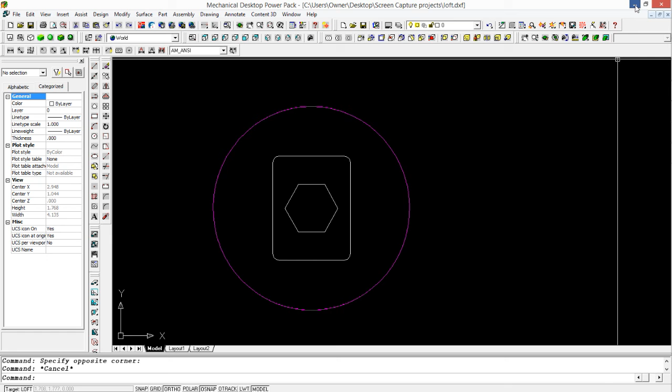Oftentimes in working with AutoCAD drawings, you have to completely close the AutoCAD drawing that you're going to be working with. That's not the case here, we don't have to close our drawings when we're working with 3ds. 3ds will grab the drawing as saved. So here we go, we're going to go ahead and open 3ds, and we'll open this file, and we're going to pick out DWG Loft. Or rather DXF Loft. There.

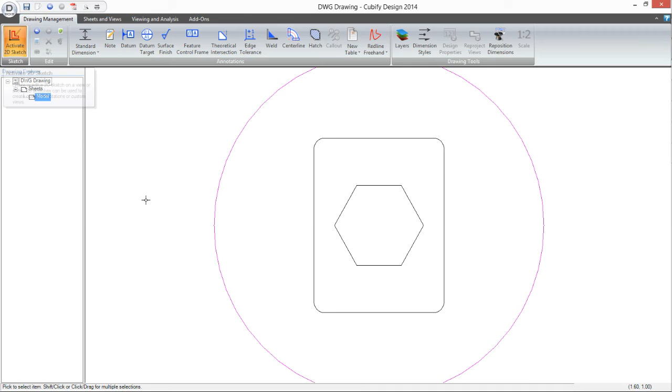Now as you can see, we have opened it, but when 3ds first opens, it opens into this creative window that, if you're using another drawing program and you're not into some kind of professional use, I don't know what all this stuff is particularly associated with, but it doesn't have much use for someone that's working out of another program to make their sketches. So we just go into sketch here, and there's our drawing.

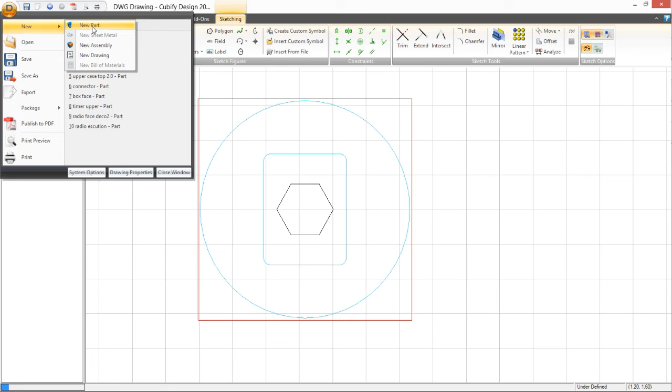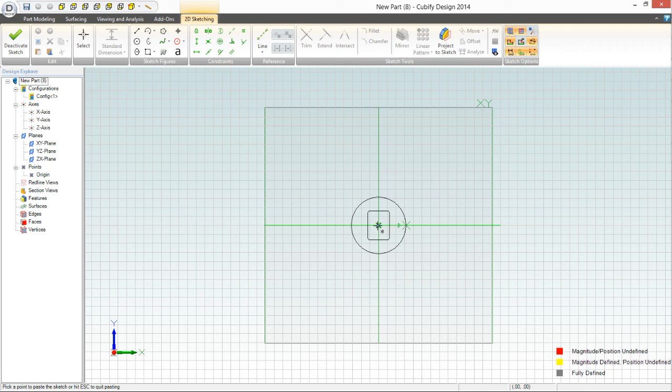Now what we want to do is collect our base. I'm holding down shift, and our locator circle, that's all. Control C, and away we go with a new part. File, new part, and it'll bring up our new part dialog page. And of course, you have to click on a plane before you can activate the 2D sketch. Control V, paste it, and the circle locates it exactly dead center as long as you have this snap on. I'm hitting escape to get rid of what's on my clipboard, and now I can dump the circle, I don't need it.

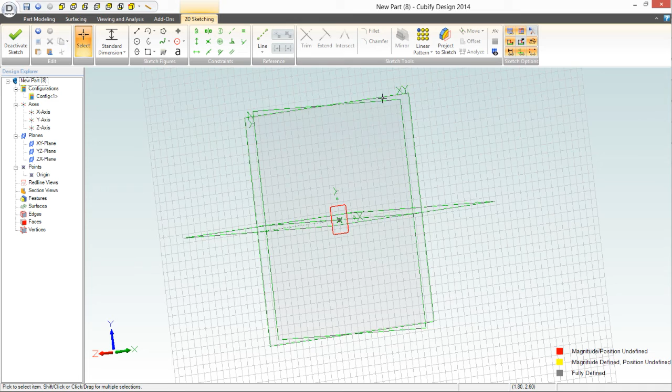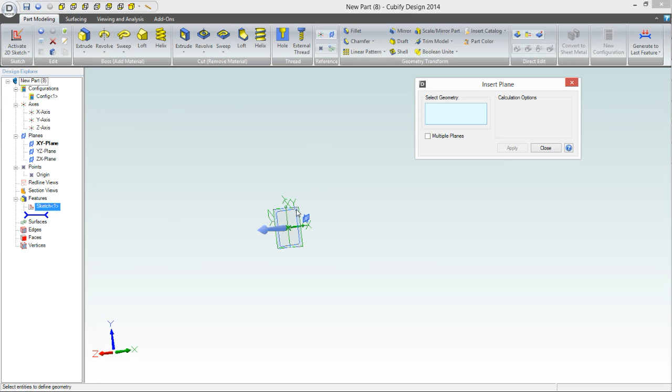And of course, we're on one plane, this is the XY plane, and we want another plane, one that's going to be floating around somewhere above this one. So what we can do is deactivate sketch and go into modeling space, then click on our plane adjustment window here and pick the plane that we want, right there, that we're going to jump forward. Let's go a bold half inch, 0.5, and close. Now we should have a half inch plane hovering above our other plane. There's our base plane, and here's our other plane.

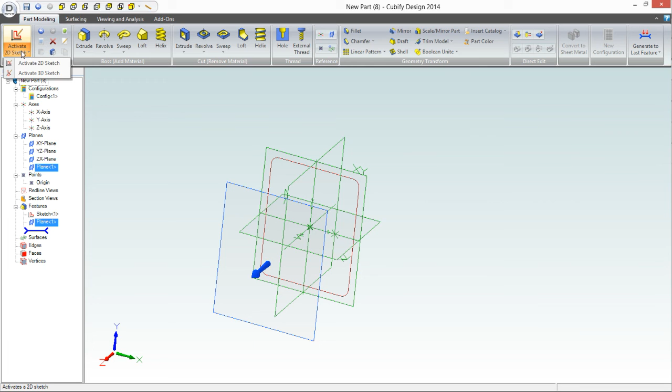That's pretty cool. Now we can click on that new plane, that's our top, and let's go back to activate sketch. Here we are with our top, and through the top one we can see the base one, sort of looking straight down on it. There's our base. We're going to now go into our sketch and pick up our little hexagon.

And as soon as we click onto it, you can see all the others are dropped. I hold shift so I can still get that circle. That locator circle is very important. Control C, and away we go.

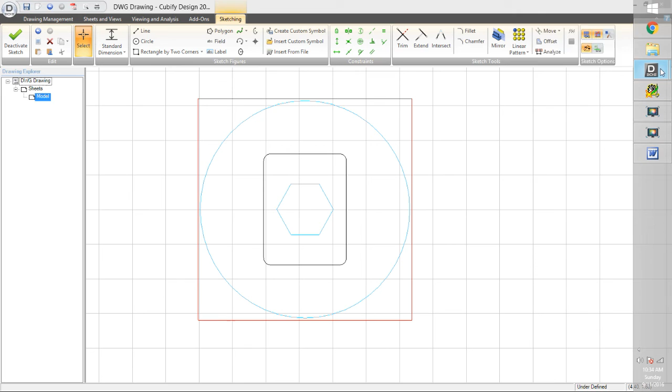Back to our part. Control T. Our circle helps snap us right directly into where we ought to be. Now let's get rid of the circle. Delete.

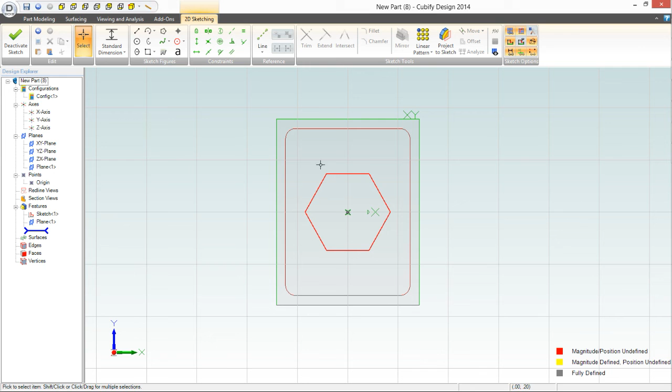Now we have our top, our little hexagon top, and our curved corner rectangle on the bottom. I'll rotate this, holding down both mouse buttons, and you can see there's our base and there's our top.

Now let's go into modeling, part modeling, and this time we're going to pick our boss, add material, Loft. And it says, you can see our blue sketch, our latest, our hexagon, has been loaded.

Now it wants to know what's your other point here, and that's going to be sketch 1. So now we have our original, which is sketch 1, our top, which is sketch 2. And it says nothing else - there's nothing else blue. Everything's been done.

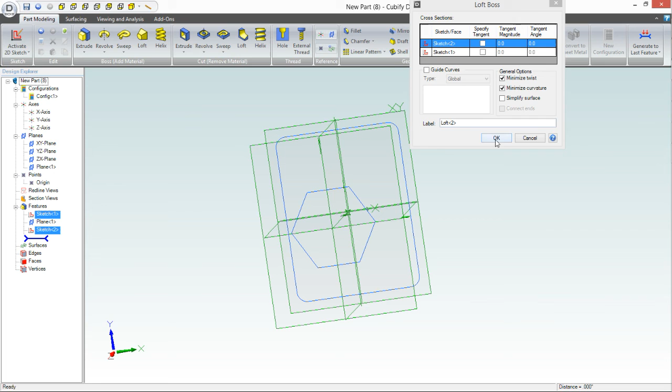Let's go ahead, okay. And it's figuring it out. And presto, there's our part, lofted exactly where we wanted it.

Now, I told you that there would be some idiosyncrasies on this. Let me shift this over into gray - I just left-clicked an empty space, and that made it go gray. Now I'm holding down both keys to rotate. And do you see the mistake, the error?

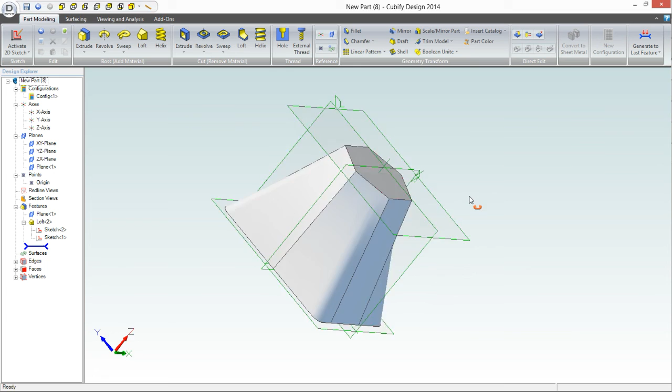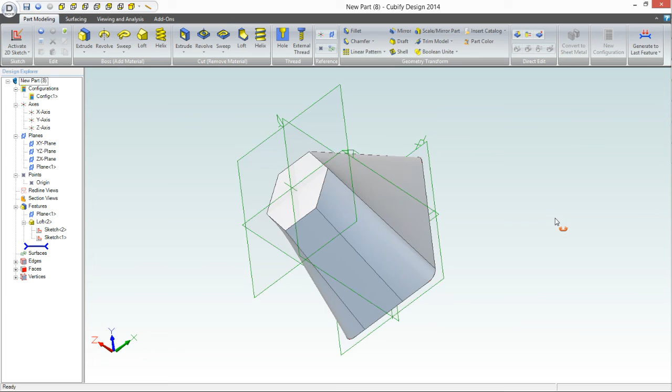So our object is not perfectly symmetrical, as you can see from this view right here. Let me get it pointed directly above. And you see how that skewed over to this, and it threw this line off. This line should be more located down here, as it is right there.

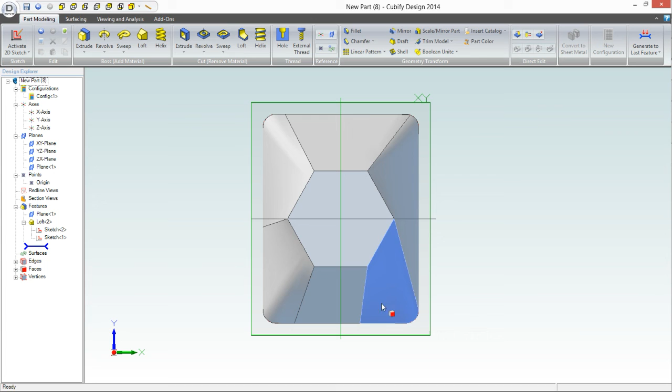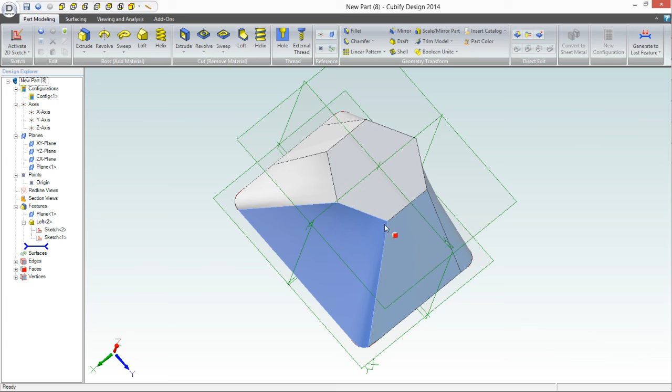And I've tried mirror imaging, slicing these in half and then mirror imaging. It doesn't matter, the computer will still do that. So I think it simply has to do with the way, the shape, the size, and so forth that you are trying to morph. You're morphing from one shape, a four-sided object with curved corners, to a six-sided object with no curved corners.

And so some of these programs - now AutoCAD would not do that. When you loft in AutoCAD, it's a direct, right up the button. But some of these other programs, you know, I think I paid $150 for 3DS.

If I bought a new program when I was in the business working with AutoCAD, I think I paid - the last version, which was, I can't remember what it was, but the last version I bought, I think it was 2010 AutoCAD, cost me $6,000 bucks. So you can see you get what you pay for.

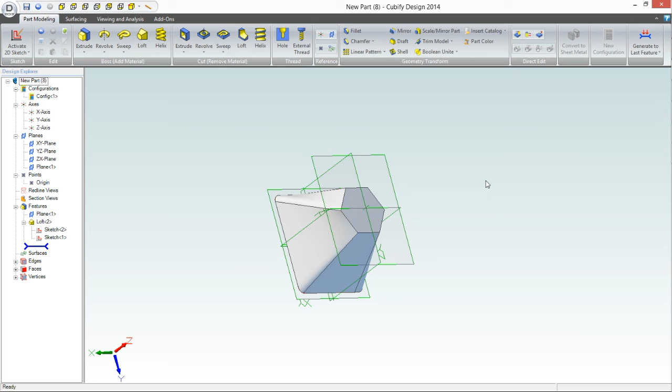Now that's not to rag on 3DS. It's a great little program, and normally it works great. If I had a circle here, it would probably just bring it right up perfectly. But I chose this hexagon and the curved corner rectangle in order to demonstrate that it doesn't always do what you want it to do.

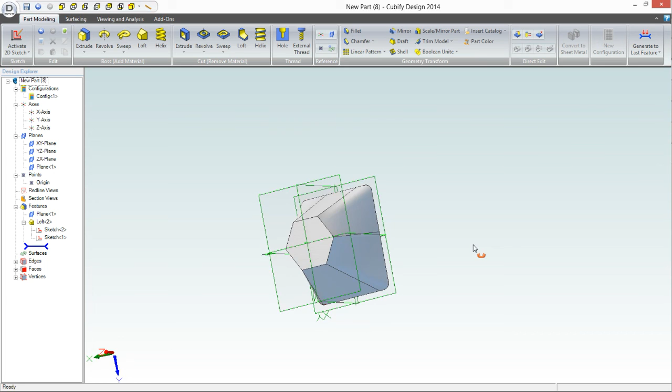I'm sure the 3DS folks are working on it, getting that fixed. But anyway, there it is.

Now you could conceivably export this. You just go to File, or you bring everything up here and export. And if I export it, which I'll go ahead and do here for you, new part, we'll call it junk part.

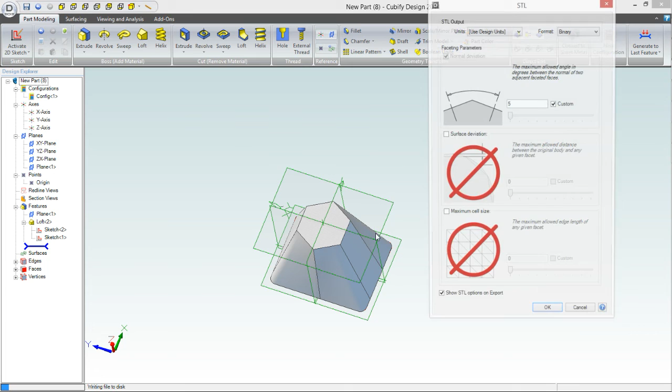And it's going to export it as an STL file. I can save. And you get this little dialog. Yes, there it goes, it's exported.

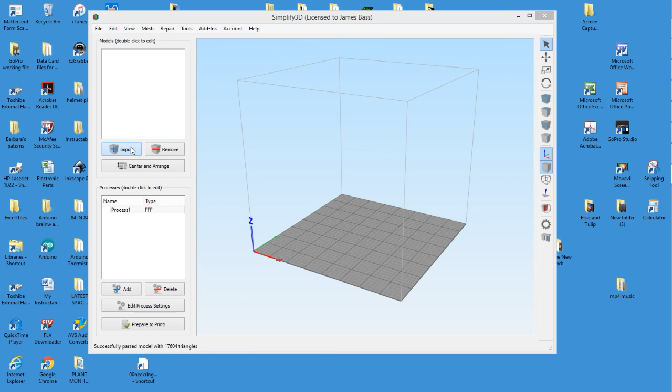As soon as you get this black window, which is generating the STL code, now I could actually load that into my 3D, my Simplify 3D interpreter here. And let me import that. Junk part, there it is. The STL file is, boom, there's this little oddity of a shape here.

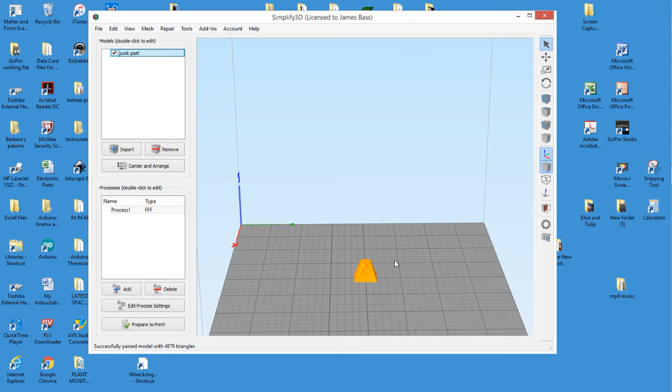It's ready to print. If that's what I wanted, that could be what? A jack stand for a model car? I don't know, could be almost anything, any little odd shape. But that's how it is.

And if I want to go ahead and print that, I would just hit prepare to print and go straight into my tools catalog, my tools dialog, and print away. It would probably take just a few minutes to print that little thing. But that's how it is.